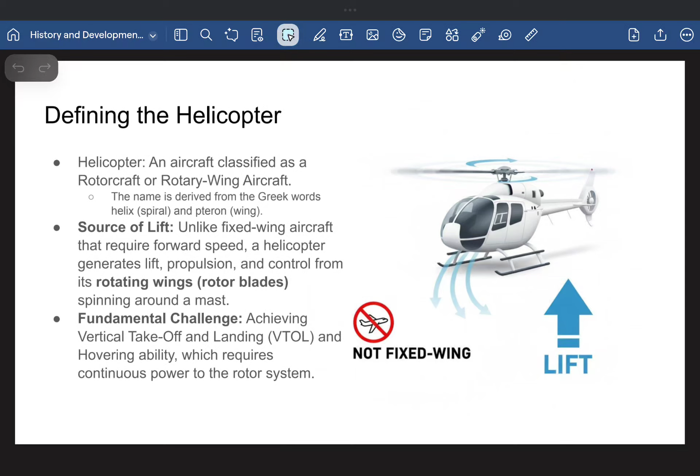So the unique design presents the fundamental challenge in achieving vertical takeoff and landing and also hovering. This ability requires continuous substantial power to the rotor system to maintain the high RPM necessary to counteract gravity. So the engine isn't just used for forward motion, it is constantly fighting weight. If the engine is damaged or dies, the fight against gravity stops immediately. So pagdating sa safety, doon na pumapasok si auto rotation, which we will discuss later on.

Here is naman, the historical foundation. So the quest para pagdating sa vertical flight. Nagsimula lahat to sa Chinese flying top in 1100 CE. Ito yung Chinese flying top, it is the earliest known conceptual model ng helicopter.

Then, nagkaroon tayo ng formalization, or it was formalized in the 15th century by Leonardo da Vinci, which his famous sketch of the aerial screw. Pero it is purely concept.

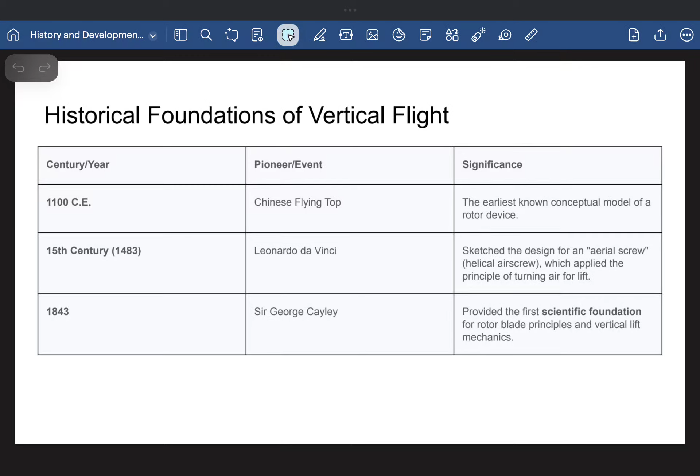So in 1843, nagkaroon naman tayo ng scientific breakthrough thanks to Sir George Cayley. He provided the first scientific foundation for rotor blade principles and vertical lift mechanics. He understood the relationship between the blade area, pitch, and lift, and this signifies the true beginning of aerodynamic theory for rotary flight.

And then in 1907 naman, kay Paul Cornu, nagkaroon rin tayo ng milestone. He achieved the first manned uncontrolled flight in a twin rotor machine. So yung kailangan niyong tandaan pagdating kay Paul Cornu, meron tayong term na uncontrolled. It is lifted but could not be reliably directed.

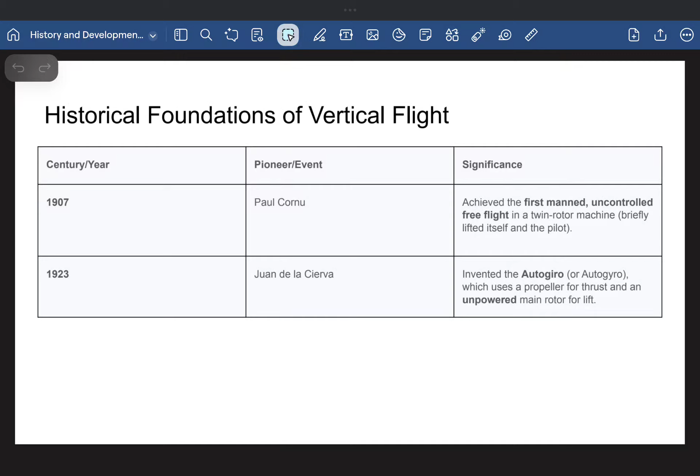And then, nagkaroon tayo ng huge leap in understanding sa rotor dynamics nung 1923 kay Juan de la Cierva, yung gawa niyang autogyro. The autogyro uses a propeller for thrust and an unpowered main rotor for lift. Its main achievement was demonstrating that a rotor system could be stable and controllable in flight. De La Cierva solved the problem of rotor flapping and stability, knowledge which is critical to the later success of the helicopter.

And then dito na nag-start tayo magkaroon ng practical helicopters. Starting with yung mga gawa ng German, yung Focke-Achgelis in 1936. It is considered the first successful helicopter because it solved the riddle of controllable flight by demonstrating full, reliable cyclic pitch capability—the ability to tilt the lift vector and move directionally.

And then came the global standard in 1939, Igor Sikorsky, yung VS-300. Sikorsky established the single main rotor and tail rotor configuration that defines most of the designs today. His design was very simple, rugged, and reliable.

And then in 1951, this one was the final major early development—the engine shift. Charles Kaman equipped his K225 with a gas turbine. This invention replaced the heavy piston engine, providing vastly improved power to weight ratios and enabling the faster, higher performance helicopters na meron tayo ngayon.

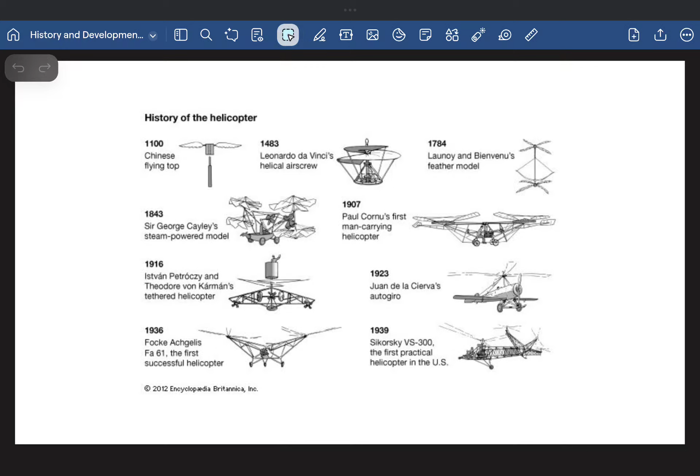So dito makita natin yung ating mga figures o itsura ng mga helicopters natin throughout history.

Then, next one natin is yung torque problem and the anti-torque systems. So the torque problem is the inherent flaw in the single rotor design. It is governed by Newton's third law: for every action, there is an equivalent and opposite reaction. As the engine imparts a rotational force, yung pinag-usapan natin last time, yung torque, to spin the main rotor, an equal and opposite torque is applied to the fuselage.

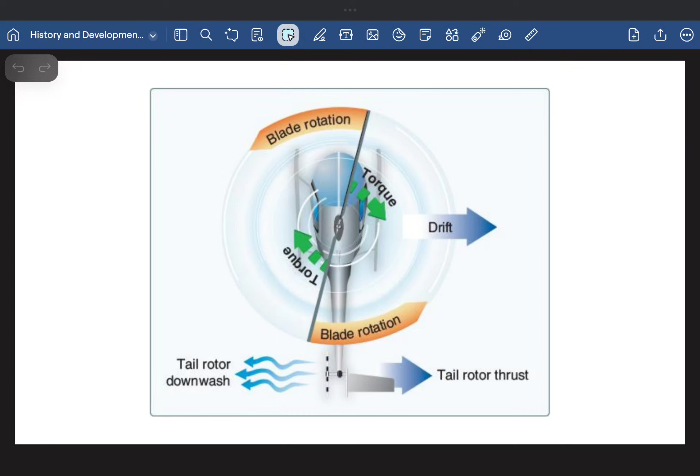So ito yung diagram. Since nagkakaroon tayo ng torque from our main rotor, kailangan natin itong i-counteract. Thus magkakaroon tayo ng tinatawag nating anti-torque solution or anti-torque system. So any single rotor helicopter must have an anti-torque system to produce force that perfectly balances the main rotor's torque. This system must be continuously adjustable as the main rotor's torque changes instantly with every power change na ginagawa ng mga piloto.

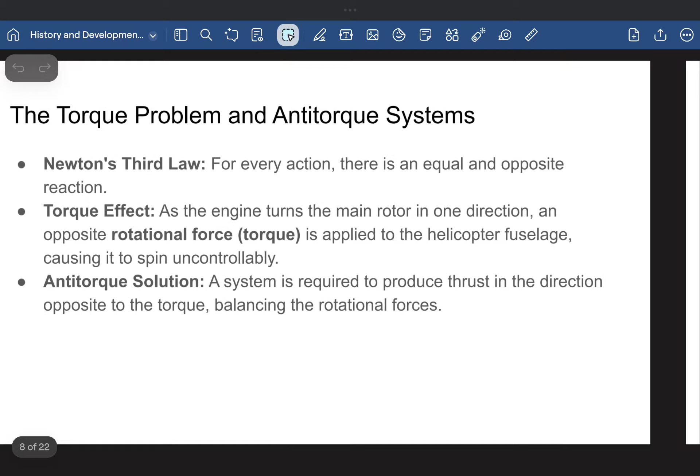So, dito tayo sa ating mga anti-torque systems. So, yung pinakauna natin is yung pinaka-classic, yung sa tail rotor natin.

It is a small propeller mounted vertically in the tail boom. The pilot uses the anti-torque pedals to change the pitch of the tail rotor blades, increasing or decreasing its thrust to perfectly counter the main rotor's torque. It provides yaw by pushing the tail rotor to the left or to the right. So it depends na yun pagdating sa piloto.

Usually it uses 10 to 15% of the engine's power. Kaya medyo maingay siya, and usually vulnerable siya sa mga tight landing spots.

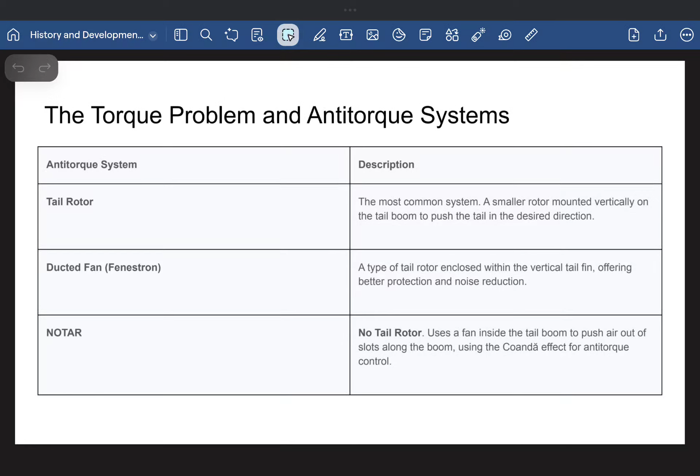Yung next one natin, ito yung pinaka-advanced na system, kaya hindi siya masyado pa common, yung no-tar or the no-tail rotor. This one uses a fan inside the tail boom to push low pressure air out, or it pushes low pressure air throughout slots along the boom, utilizing the Coanda effect, wherein the Coanda effect is the tendency of a fluid jet to be attracted to nearby surfaces. So this provides a cleaner, quieter solution without exposed blades. Ito yung ating notar.

Ngayon, next natin is yung mga major helicopter configurations, or yung mga itsura o mga types ng ating helicopters. Una, yung ating single rotor na helicopter, which is pwede na siyang matawag the workhorse of the industry kasi sa design niya, it is very simple, efficient, and versatile, which is why it is very popular kahit ngayon. However, it is entirely dependent on the anti-torque system for stability and directional control.

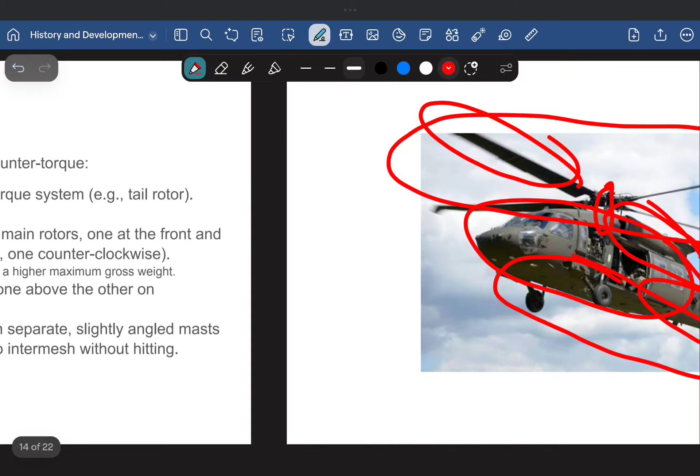Lastly, yung ating intermeshing - medyo baliko yung itsura, angled yung blades, this one. Kung papansin niyo, wala rin silang tail rotor. So pagdating naman sa intermeshing...

Sa pagdating naman sa intermeshing rotors, it uses two rotors separately, slightly angled yung mast niya that counter rotate. Magkaiba yung kanilang direction ng rotation, at perfect yung timing niya para hindi sila magkatama yung dalawang blades. So mechanically synchronize sila to intermesh without hitting.

Pinakamagandang example dito is yung K-Max, ayun yung pinaka prime example natin. It is specialized for external load lifting due to its low empty weight and very powerful lift.

Pagdating sa single rotor natin, yung single rotor ay the most aerodynamically efficient in forward flight. The counter-rotating types are more mechanically complex but eliminate power loss due to the tail rotor. However, dahil mechanically complicated sila, hindi sila masyado nagagamit. Kaya usually, ang pinaka-common and widely available is yung mga single rotor na configuration.

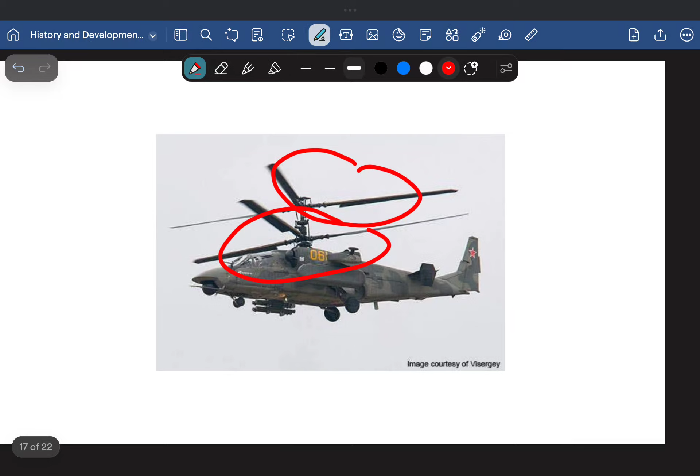So next is the primary flight controls and auto rotation. Flying a helicopter requires the pilot to master the simultaneous coordinated use of three primary flight controls.

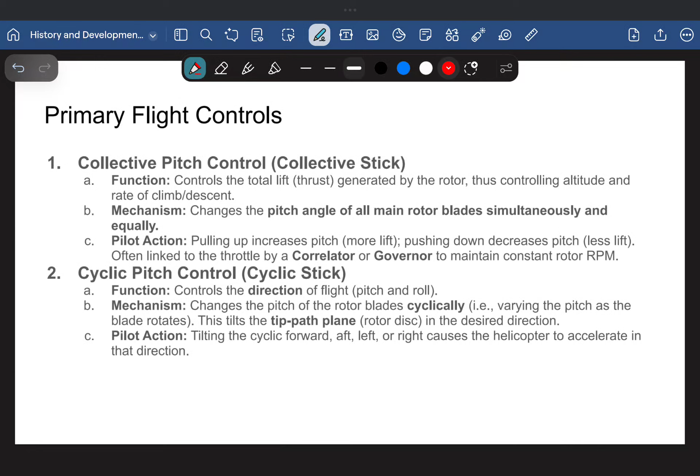Then next is what we call the anti-torque pedals. The anti-torque pedals control the heading or the yaw of the helicopter. They adjust the pitch angle and thus the thrust of the tail rotor. They are essential for two reasons.

First is heading control, to intentionally turn the nose left or right. The next one is torque compensation, which is to instantly and precisely balance the main rotor's torque, especially when the collective is moved up or down.

Next is the freewheeling unit. The freewheeling unit is the ultimate safety mechanism that a helicopter has. It is a one-way sprag clutch located between the engine and the rotor transmission. Its function is to automatically disengage the engine from the main rotor if the engine fails.

This allows the main rotor to continue spinning because of the airflow, enabling the pilot to enter auto rotation, which we mentioned earlier happens when there's an emergency or a problem with our engine - that's when auto rotation comes in, which is a controlled, unpowered descent. The kinetic energy of the spinning rotor is conserved and used to cushion the landing, turning the rotor system into an effective glider wing. Basically, this is the helicopter's version of gliding.

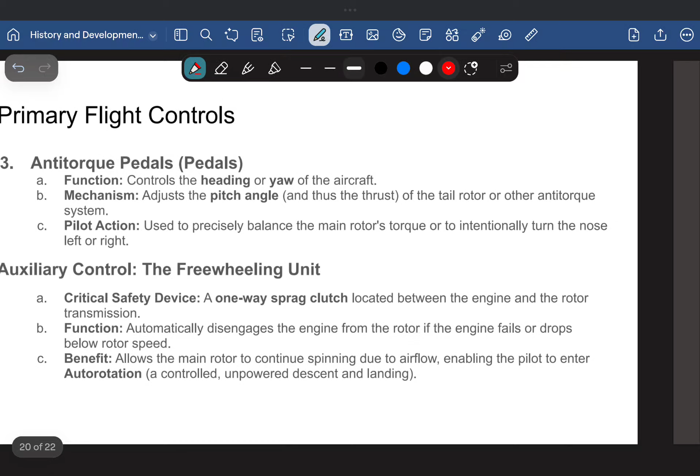So now we move on to rotor system mechanics and articulation. The hub system connects the blades to the mast and defines the helicopter's control complexity. For control, the blade must be able to move in 3 axes.

First is the feathering, the pitch change - it is basically the rotation of the blade around the span-wise axis. This is controlled by the swash plate for lift changes.

The next one is flapping - the vertical movement, the up and down movement of our rotor blades relative to the hub. This is critical to balance lift asymmetry, or the difference in lift between the advancing and retreating sides of the rotor disc in forward flight.

Then next is the lead or lag, or the hunting - the fore and aft movement of the blade in the plane of rotation. This accommodates changes in blade speed due to the conservation of angular momentum as the blade flaps up and down.

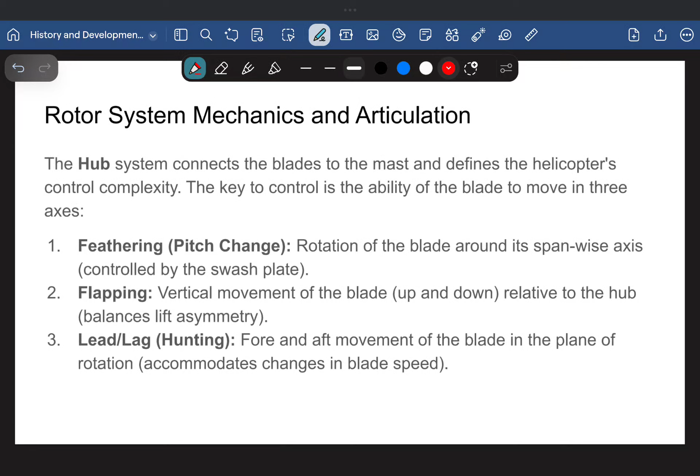Now here are our rotor system classifications. First is what we call fully articulated - each blade is individually mounted with separate hinges for flapping, lead-lag, and feathering. This classification provides the most dynamic freedom among rotorcraft.

Next is our semi-rigid, which is typically a two-blade system mounted on a teetering hinge that acts like a seesaw. It flaps as a unit - when one blade flaps up, the other flaps down. It permits feathering and flapping as a unit.

And then lastly, our rigid, or the rigid blade - the blades are rigidly fixed to a hub without hinges. Flapping and lead-lag motions are absorbed entirely by bending and flexibility of the blade root. What's left to allow is basically just the feathering.